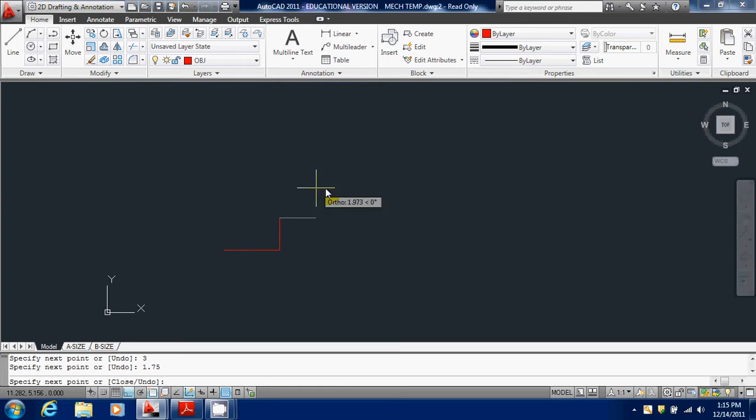Go into a new mech temp, make sure you're in the object layer, line, in ortho. Our front view is 3 inches wide, 1.75 inches tall, 1.75.

Now our next view is going to be the right side view. We're going to place it over in this portion of the screen. To do that, we need to offset a distance to where that's going to start. So I'm going to offset this sideline 1 unit, so we know that's where it's going to start.

Now the next thing we're going to do is begin to look at some of the features of this side unit. One of the best ways to do that is use construction lines to give us some guidelines to draw with. So watch how I do construction lines.

I'm going to go up to my object layer, my layer properties. I'm going to go to my construction layer and change it from white to dark gray. That just helps me see it a little better. I'm going to check mark that and close it. So I'm on the construction layer. Let's see how that looks.

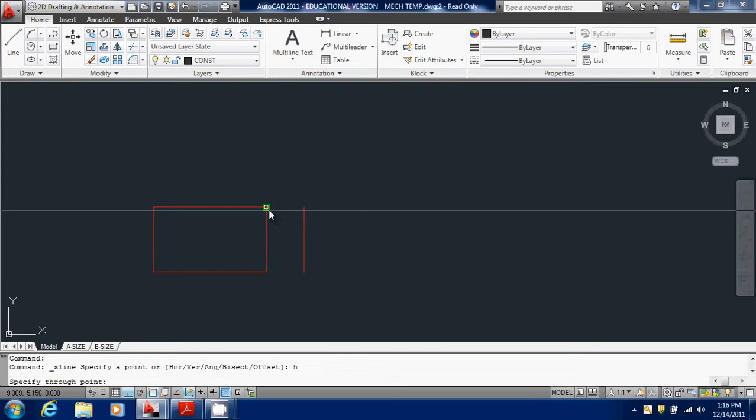We're going to do draw construction line, and down here we're going to hit H for horizontal. That's going to allow us to lock onto a point. We're going to lock onto the top one and the bottom one.

Alright, next thing we're going to do is some vertical ones. Line, construction line, V for vertical. Click on there and there. That's the direction we're going to be offsetting to get to our other views.

The last step is to highlight the 4 construction lines and come up here to send to back. Now the red ones will stay on top so we can see them.

Now the question is, how long is the right side view? That answer is right here, 5.25. How tall is it? It shares the same height as the front view. So let's put that in place now.

Switch back, object layer, line, point there, 5.25, down 1.75, back 5.25.

Now we can do the same thing up here. Do our top view. Offset 1 inch, that line. Now, how far back does the top view go?

Well, it goes back to the same distance as the side view. Let's take a look at that. Top view would go this way, 5.25. Line, straight up, 5.25, over 3, down back home.

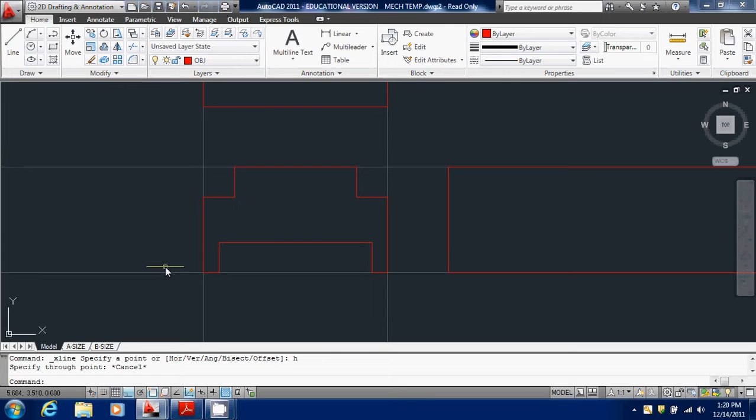Construction line, H for horizontal. Now I'm going to escape out of that and change my layer first. I forgot to do that.

Construction, draw, H for horizontal. 1, 2.

Construction line again, V for vertical. That's an important feature I would see. That's important, and that's important.

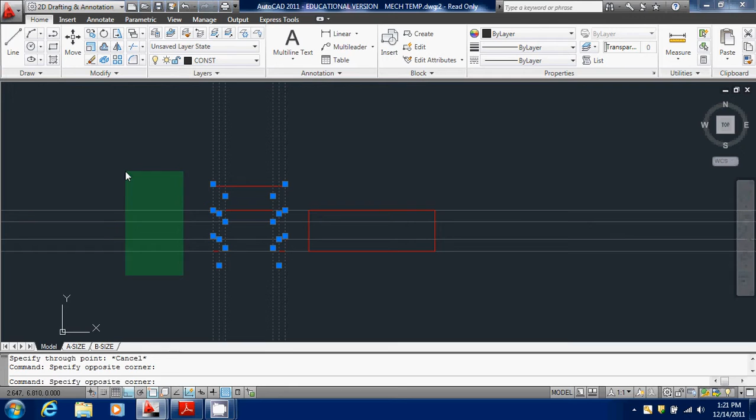Now, last thing to do, zoom out. Select all these lines you've drawn and send them to the back. You can still see our image there.

Now let's take a look. We need to draw this right side view. What are we going to see when we look at it? Well, we're going to see the bottom line. We'll see a step line and a top edge.

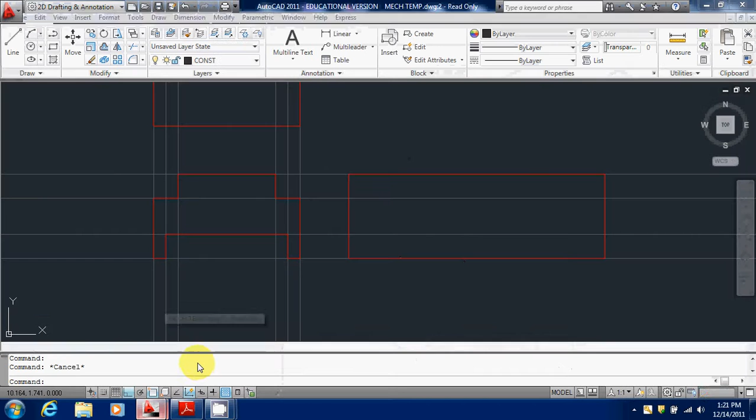Let's go back and do that now. We definitely see this top edge line. So I'm going to go back to Object, line, here to there. That's that step.

Now this cutout right here that we see notched out from the bottom, we can't see it from the outside, but it still exists. There's a construction line there. That's where we put in what's called a hidden line. That shows us that if we were to cut through this item, we would see it there.

Let's quickly turn off our construction layer and see how that looks. So that is our right side view. Alright, now let's turn that back on.

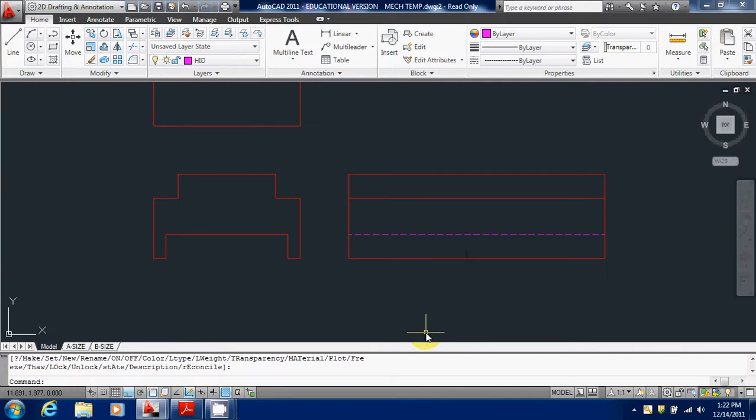Let's work on that top view. Looking down, we're going to see this step right here, where my mouse is. However, this corner notched out exists, but it's hidden, so we have to make sure we have the right line for that.

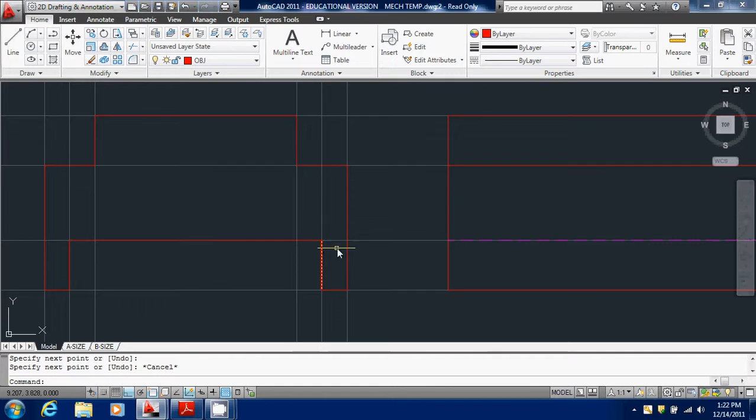First, let's do the one we see first. Object layer, line - this is the corner that we see. We line up with it, draw our line, repeat line, there to there. Now this one lines up with our hidden line. Switch to hidden, line, there to there. Repeat line, there to there.

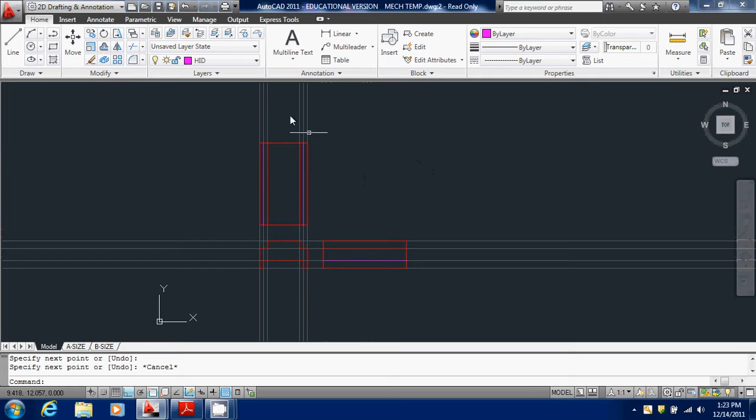Now again, we can turn off construction and take a look at our object. Looks pretty good - all that's missing now is the holes. So let's figure out where those holes are going to go.

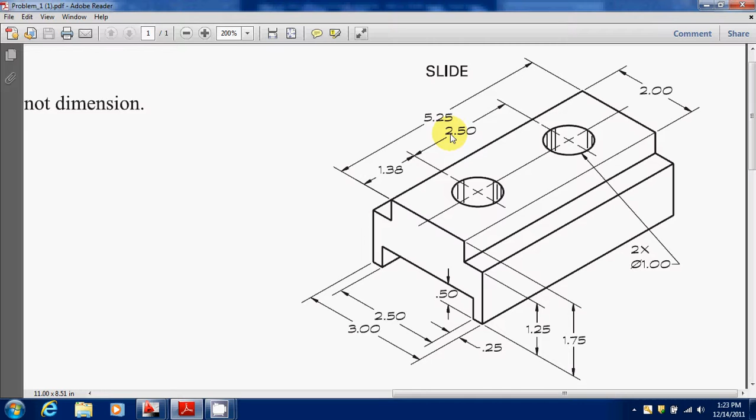This shows us that they're centered right down the middle of the object. There's 2 of them, and they have a 1-inch diameter. The first one's distance is 1.38 from the front. The next one is 2.5 from that one.

So easily, we come in here. I'm going to leave my construction lines off for a minute, and I'm going to offset 1.38. Offset that line to there. Offset again, 2.5 from here to here.

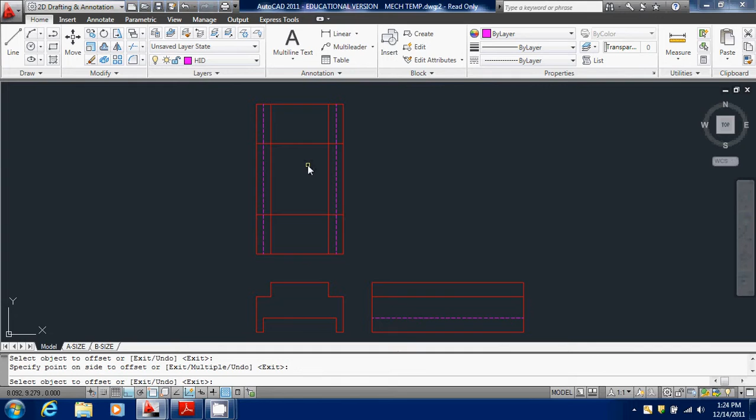Now I'm going to quickly change those to construction lines, which are also off - I have to turn back on. And I'm going to draw a construction line vertically right down the middle of this object. There we go - so now that's where my holes are going to go.

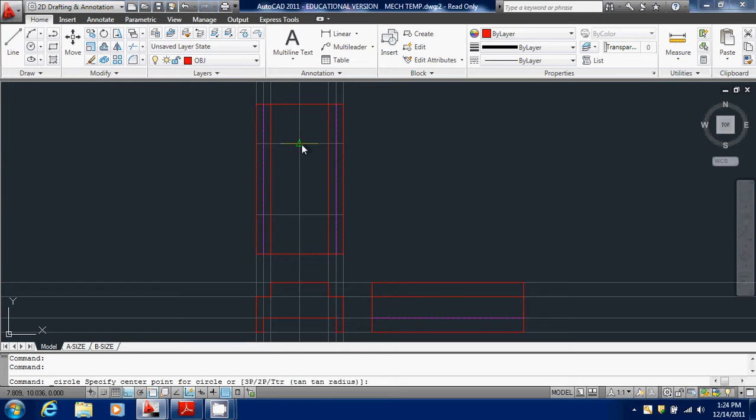Go back to my object layer. I'm going to draw a circle - specify the center point right there, hit D for diameter, 1 for the measurement. Same thing, circle, center point, D for diameter, 1 for the inch for the diameter. Alright, so those are in the right place.

Now we need to start transferring that information down into these two views. We see the holes from the top; they're hidden from the side view.

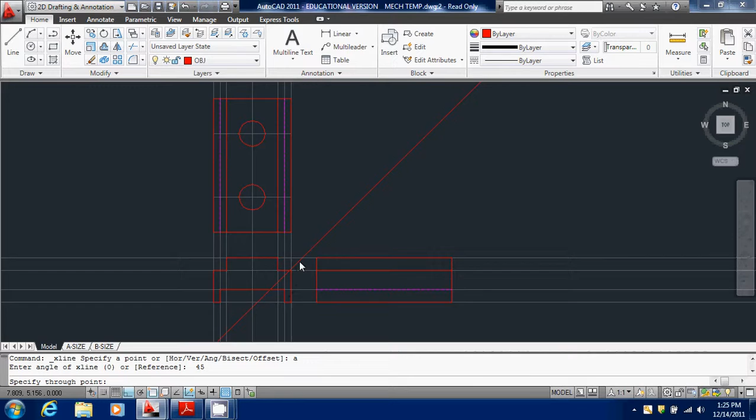First thing we're going to do is another construction line, and we're going to hit A for angle, and do a 45-degree angle. Then specify the point it's going to go through, right here, then hit escape. I'm going to change that to construction.

Now watch, this is kind of the cool part where we see where things get transferred. I'm going to come in here, switch to construction. Again, construction line, H for horizontal. I'm going to put it right through the center of the circle.

Then what I can do is another construction line, V for vertical, and drop them right off the points that cross my 45-degree angle line. That is now the center point, center line of those circles.

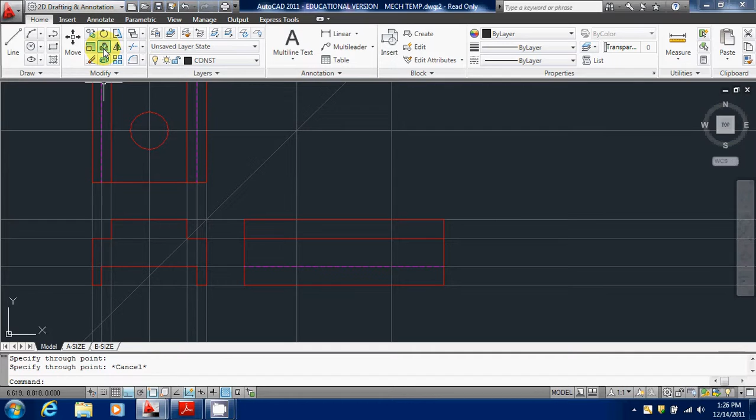All I need to do is offset the construction line, 0.5 for the radius, one way that way, one way that way, and that way. Hit escape.

These are hidden lines now. Line from there to there, there to there. Repeat line here to here, here to here. Now let's see what that looks like.

I'm going to turn off construction, and I can see hidden lines in the background, hidden lines vertically for the sides. We need to show that circle here and add in some center lines. Turn construction back on.

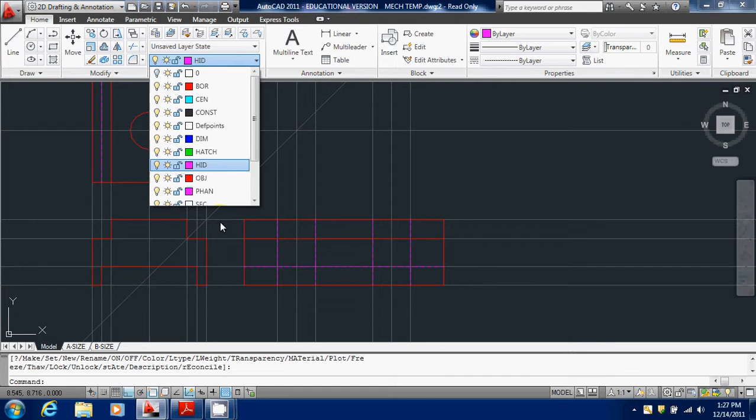I'm going to draw, again, construction line, V for vertical. I'll draw one off the side of the circle - the center of the circle is already done - and the other side of the circle. Switch over to hidden, line, top to bottom, right click, enter, right click, repeat, top to bottom.

Last thing this needs is center lines. We'll come in here, switch to center line, and draw a line down the center of the circle.

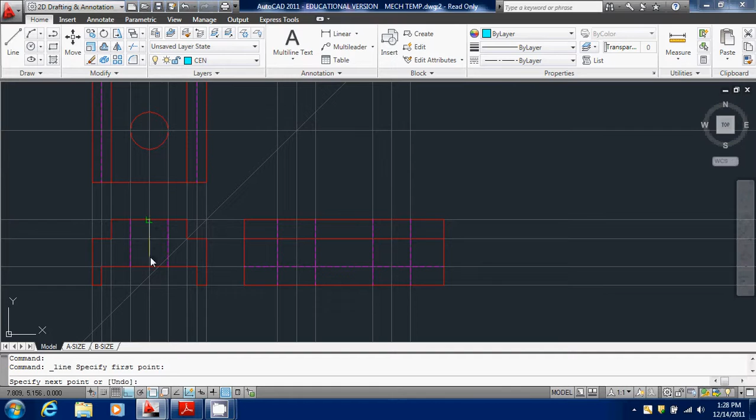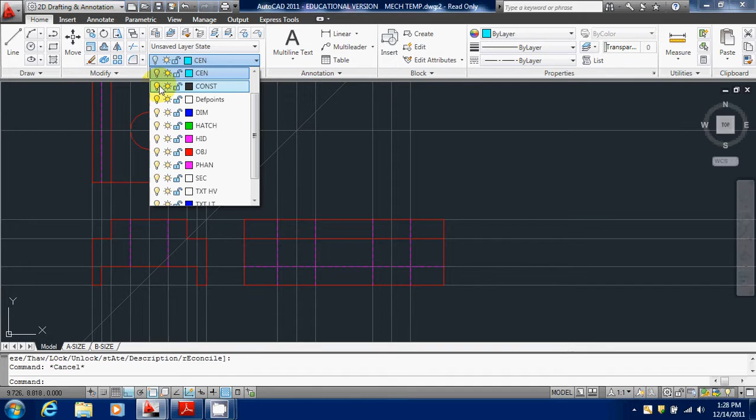Now I did make one mistake - I'm going to fix that real quick. I'm going to turn off my construction now. Alright, I went too far with these holes - these holes are cut out of this portion, not out of the leg. All I need to do is come back and trim.

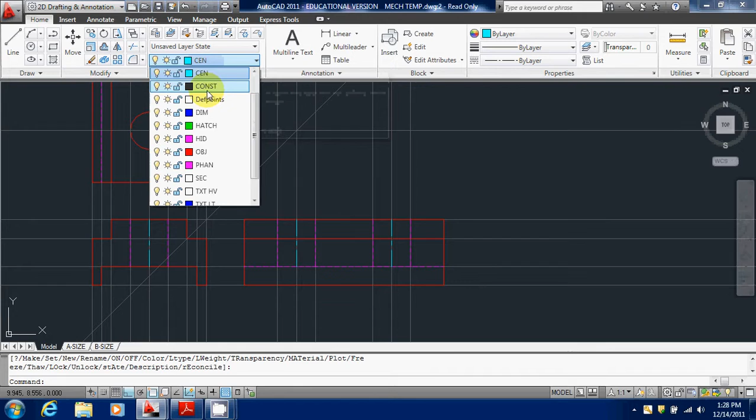And that's much better - hidden lines. Now let's go back and turn on center and construction. They're right there. Let's turn off just construction.

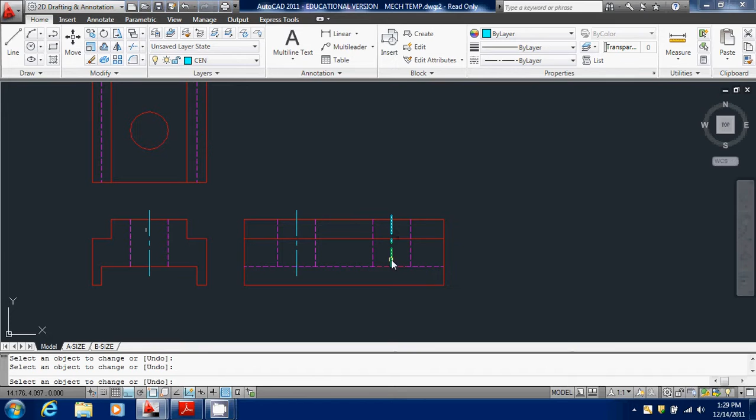All I need to do is lengthen my center lines. L-E-N, enter. D-E, enter. 0.125, enter. Top of the line, bottom of the line. Top, bottom, top, bottom, top, bottom, top, bottom. Alright, and we are all set there.

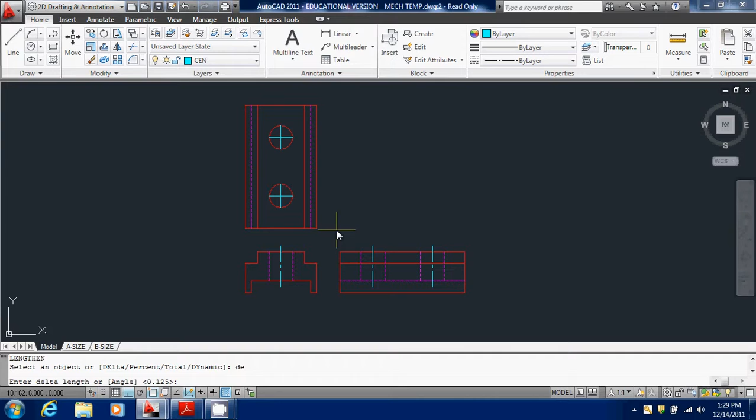This drawing - oh, we got to add in a couple more lines, center lines there. I'm going to copy that, lengthen, DE, 0.125, and work myself around. I'm just going to do one click on each side here. Alright, and that is everything we need for this activity.